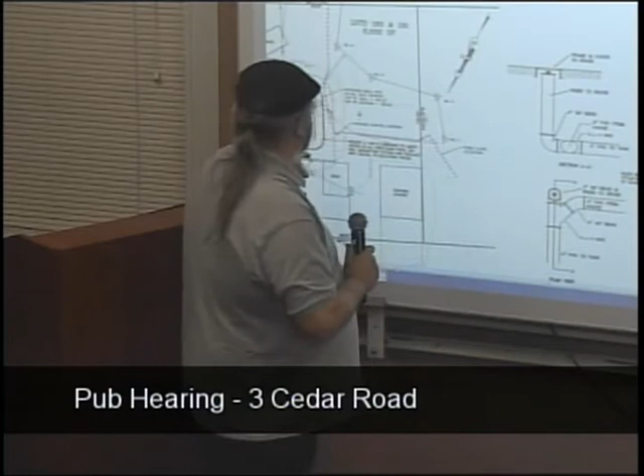Here's my erosion control. Right now, the wall is 5 feet off the system. This is, I don't know if you can see it, the crosshatch and the dotted line right here. That's the overdig area.

Wait a minute, this is the overdig area? I believe, right here. What's the highlight, the dark line that you've got going on? That is your overdig area?

No, that's the retaining wall, with the barrier. See, just inside of that, there's the dash line and it has the hatch in it. Okay, that hatched area is the overdig area. And how many feet between that and the wall is that?

5 feet there, and I've got another 5 feet to the erosion control line. Okay, so you get 5 feet from there to there and then 5 feet to here, so there's 10 feet. So they're digging, when's the wall go up?

Once they remove all the topsoil and subsoil and any material that can't be under the system, then they will start to build the wall as they're coming up with the gravel.

Okay, so we're gonna have erosion controls, you're gonna dig the stuff out of there. Correct, and carry on that conversation for me. Again, whatever's within the overdig, the topsoil, subsoil, and any other unsatisfactory material under the system will be removed, and then septic gravel will be brought in from that grade to just over the system.

And then when does the wall come in? The wall will be constructed as they bring the gravel in. And what do you end up with for top elevation on top of the septic system? The leaching area there, a 186.5 here, and it slopes off to 186. The top of the wall is at 185.25.

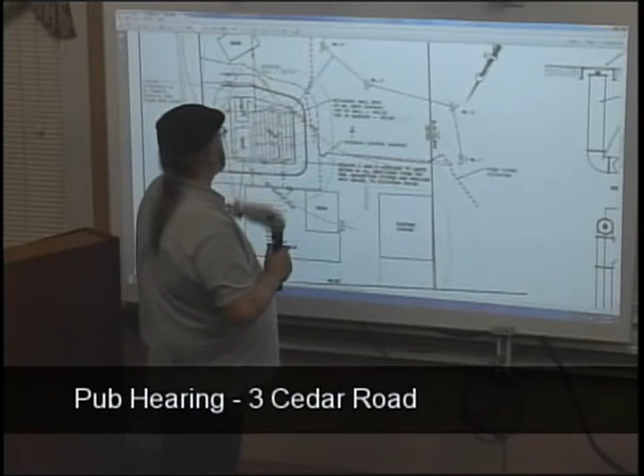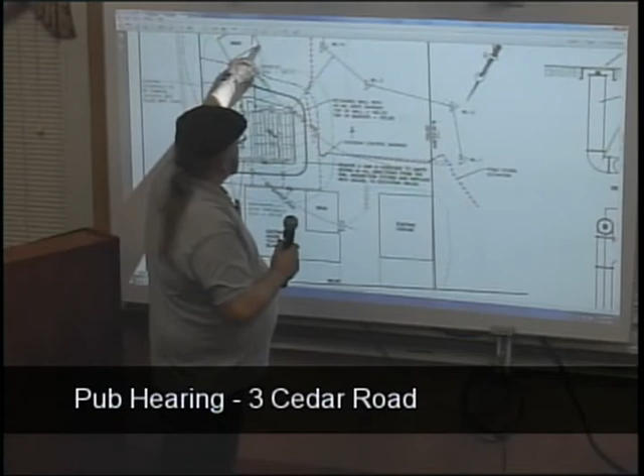That's your call. I just want to make sure they have room to work. If it's okay with you, I'll take this erosion control to the back corner of the shed and bring it down in the field. Typically we go out and stake the erosion control line, they put it in, then we inspect it and send you the letter that it's installed as per the plan. That might give them a little more room if they gotta get into that tree, and it's already there so we don't have to worry, and hopefully people aren't driving wherever else.

And is there a disposal area for the stuff as you're moving it out? It'd be loaded in trucks and hauled right out. There's not enough room on this lot to stockpile anything, so we just want to make sure it's not on the other side.

Do we have a DP number for this? Yes, that came in last week, 625. I didn't get an order of conditions ready because, as far as I knew, there were gonna be changes with Board of Health to the plan, so I've been waiting. Board of Health hasn't approved this yet? We have a meeting with them Monday. We had a previous meeting with them for some waivers, and in their agent's review there were a couple of notes and stuff that had to be changed on the construction details, and there's one additional waiver we have to request.

So we'll be before the Board of Health Tuesday night for that additional waiver. So if we continue this to March and vote on it then, once you have, hopefully, the Board of Health's approval, then we can approve it and you're good to go.

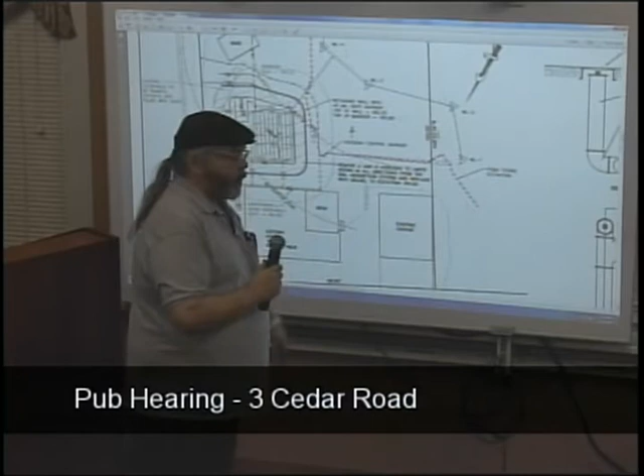Okay, I'll entertain a motion to continue NOI 240-625 until March 11th at 7. I move to continue NOI 240-625 to our March 11th meeting at 7. Second.

Okay, any more discussion? Is there anybody in the audience regarding this? Okay, all in favor, say aye. Aye. Opposed? Okay, that passes. We'll see you next month, Jim. Thank you.

Okay, 15 Lincoln Road. The applicant isn't here, right? They're continuing that. For Lincoln Road? 15 Lincoln Road, that is correct. We have an email requesting continuance of that.

So I'll entertain a motion to continue 15 Lincoln Road, 240-0624, to the March 11th meeting at 7:10. Move to continue 15 Lincoln Road, NOI 2400624, to the March 11th meeting at 7:10. Is there a second? Second. All in favor? Aye. Opposed? Okay, that passes. Which brings us to Meetinghouse Road.

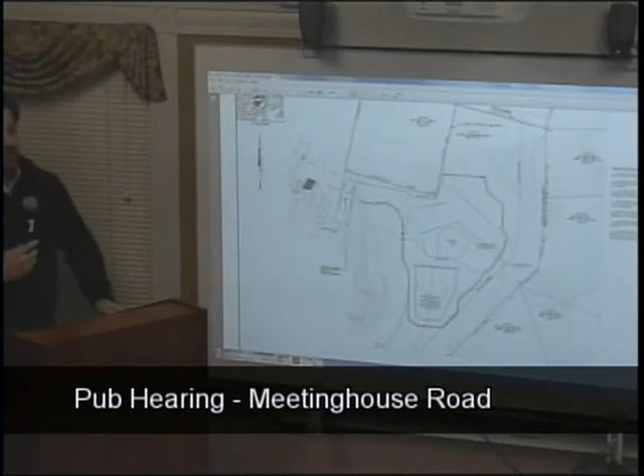The applicant originally hired an environmental scientist who came out and reviewed the area. The resource area in question is this low depression here. It was actually originally constructed as a detention pond. Wait a minute, Amy, could you blow that up for us? Go back down. It was originally constructed as a detention pond for the townhouse development.

However, the Townhouse Association wasn't able to provide adequate maintenance records, and the Mass DEP Oliver site actually deems it a human-altered shrub swamp. But, excuse me, that was put in because of the planning board on the original development. Don't they have a say in that, of being taken away as a retention basin?

We've been in front of the planning board, and they are leaning, I think, toward your commission's designation on that. But we've actually, last night, received conditional approval through the Norfolk Planning Board as part of this project.

So if we scale out a little bit, the project will require overall clearing of just under an acre of vegetation. The work within the buffer zone, we're staying out of the 50-foot no-disturb, which is designated as this buffer here, and this represents your 100-foot. The work within that 100-foot buffer is approximately 10,200 square feet to construct this proposed solar array.

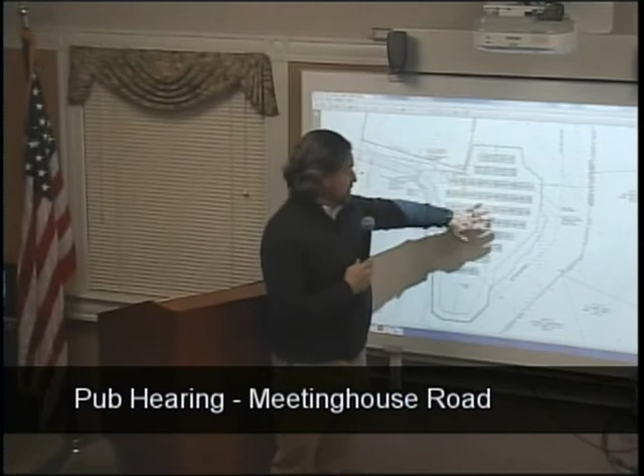The gravel drive will provide access for maintenance vehicles and emergency vehicles if needed. All has been reviewed with the Norfolk Fire Department. For purposes of drainage, as I noted, we're maintaining the existing grade to the maximum extent possible. There is a shallow drainage swale that will be on the eastern side of this gravel drive, with a series of check dams within that swale to help with sediment control.

And then, to direct runoff that currently flows off-site toward the abutters, we're proposing a drainage swale on this east end, again with a series of check dams which will direct runoff to what you see here as this proposed infiltration pond.

The pond itself, we performed test pits on site. We worked with Beta Group fairly extensively through the planning board process, and although this detention pond looks large, it's only basically 1 foot 4 inches deep, due to the underlying soil conditions. Our design stores and infiltrates the 100-year storm event, and we have a foot of freeboard around three-quarters of the detention pond, with an emergency overflow that would, in an event greater than a 100-year storm, continue flow of water in its natural direction.

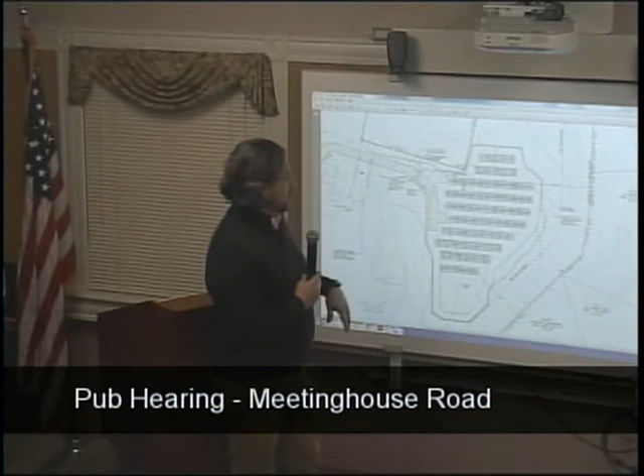The work we're proposing is limited to the area between the 50 and 100-foot buffer. No work is within the 50-foot buffer zone, and we've pushed this gravel drive as far north as possible to stay outside of the buffer zone within that area. We have submitted to Natural Heritage.

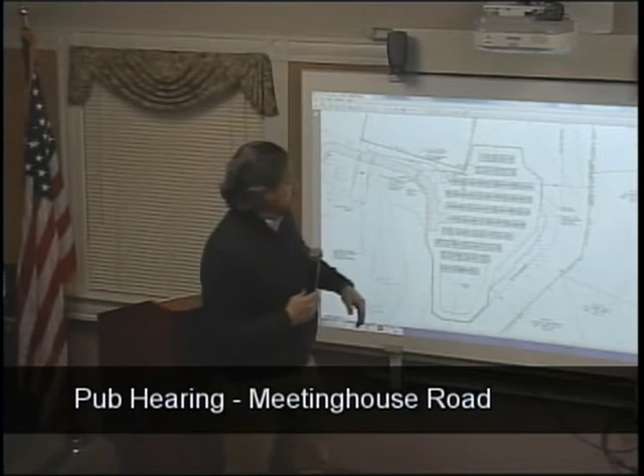This area does lie within a Natural Heritage area, I believe for the box turtle, but we have not received a letter back from them yet. If you're familiar, this is the easternmost access drive off of Meetinghouse, and this is the existing pump station for the sewer treatment system. So it's the area behind that. The grade drops off very steeply to a little pond area, and then it gradually slopes back up. And this is the water tower.

The area of disturbance with the solar arrays will be reseeded with a conservation mix. There are actually two seed types proposed in the planning board's conditions that the applicant has no opposition to. An operation and maintenance plan was provided with this application as well for review, involving cutting it a couple times a year.

One thing not shown on this plan that was discussed last night, and that I'm still working on with the planning board, is we are going to add some additional evergreen vegetation along this fence line to provide more screening to the abutters along Union Street.

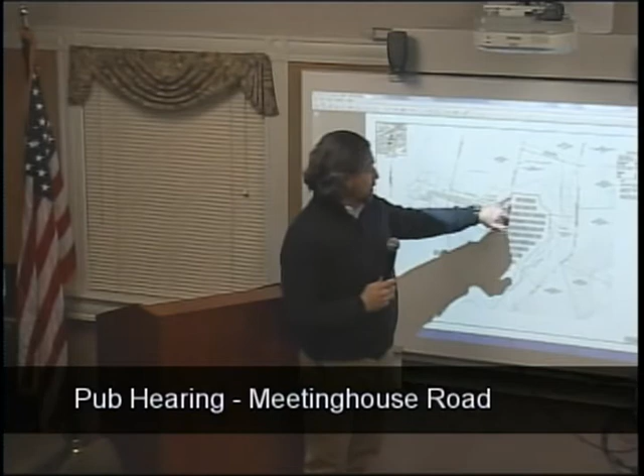Where exactly are we going to plant these? It's going to be along this eastern fence line. I'm in the process of working that out with the town planner. It will be outside the proposed chain link fence. Around the perimeter, basically the limits of clearing will be a 6-foot high black vinyl-coated chain link fence, set 6 inches off the ground to help with critters.

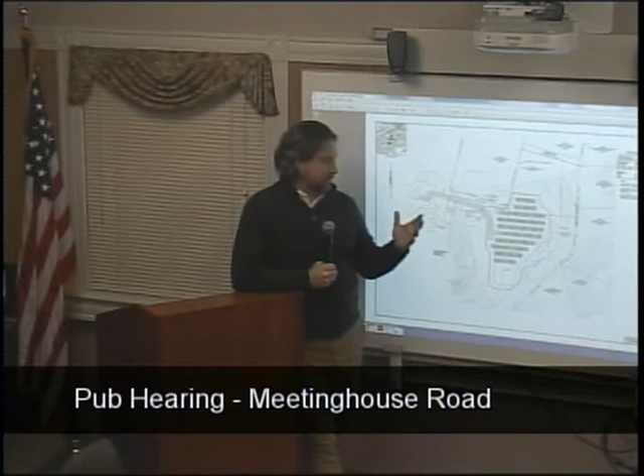Will those trees and shrubs be maintained for a while to make sure they take? Yes, I've had them die before, many of them. Within your zoning bylaw, there's a maintenance requirement associated with what they refer to as a green belt. Although we are outside of the 100-foot buffer requirement, we've worked with the planning board and the applicant has agreed to install additional vegetation, and as part of that, they'll be required to provide a maintenance fund.

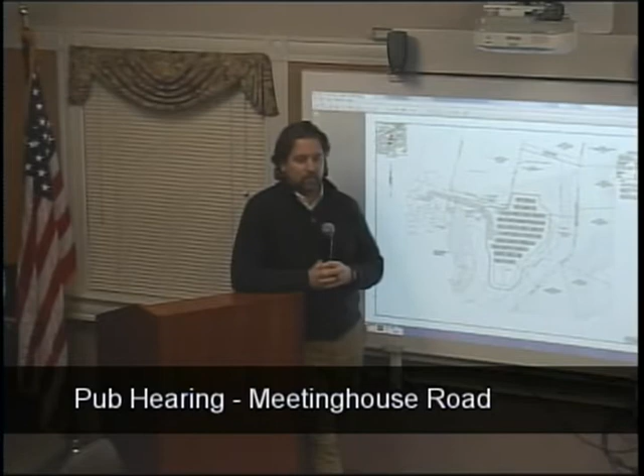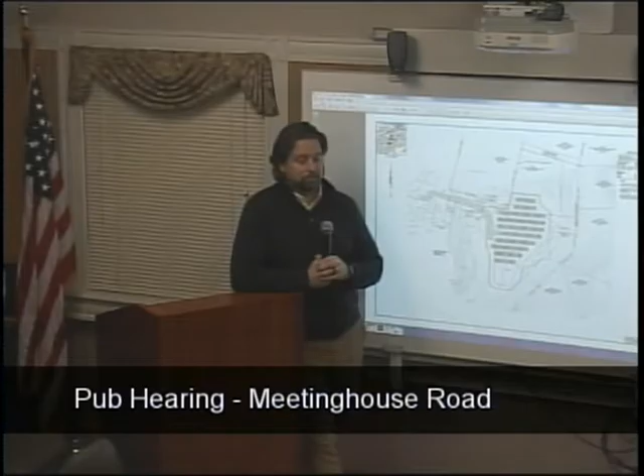But it was a retention pond, according to Rich. Well, that's something I heard about this afternoon. Yes, anything we get is supposed to be in by Monday before 6 o'clock, so we can look into that. But I appreciate you, regardless of what it is, calling out the area. I do appreciate that, thank you.

Anyway, so it's on this upper end here, but can somebody spot check to make sure I won't have a problem if that's within the 50-foot do-not-disturb area? Then there's no quibbling about it. I just want to make sure, because that's obviously an area where water is going now, so make sure there's room for it.

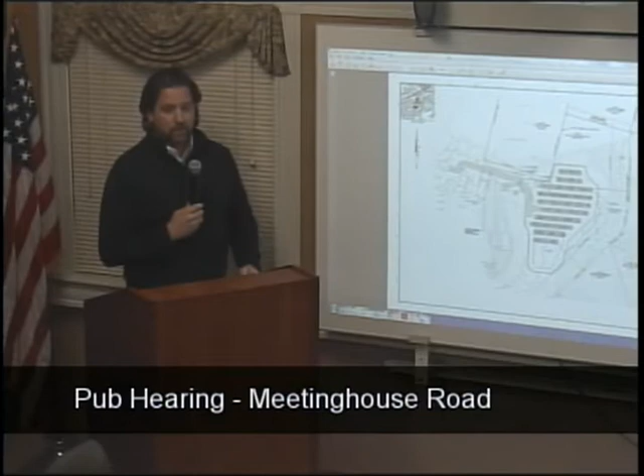There's a lot of boulders and miscellaneous trees and everything out there though, right? Well, within that area, the trees will be cleared. I can't speak to what the applicant will do with some of those boulders.

So the pitch out there is okay for all the solar, the way it is now? So they don't have soils that they have to dig up and pull out of there? They do not. So again, these bold lines represent the proposed contours, and obviously there's some grading associated with construction

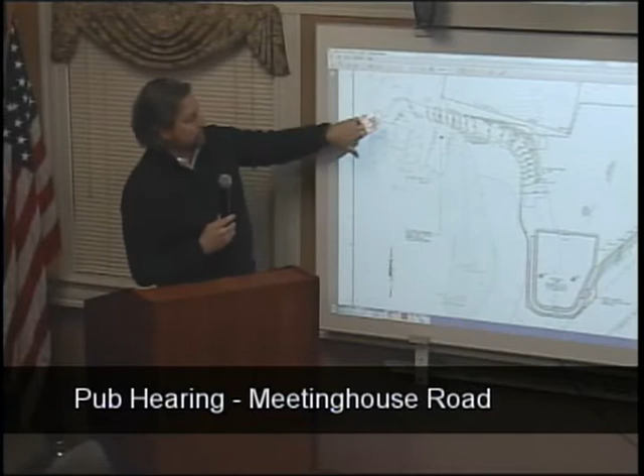of this gravel drive. It's still relatively steep, but because it's not technically a road, the planning board was okay with that in terms of access, because you're talking about trucks coming out here a handful of times a year to do maintenance and just check on things. So that's the limit of the grading for the drive.

There's some minor grading around this detention pond, and then all of this is just kind of maintaining existing grade. It'll be obviously different vegetation and cover type, but right now it's wooded and it will be grassed, as I said.

And then there's this swale that I talked about on this side to help direct water towards that detention pond. Do they expect any overflow from the side there, or do they think that it's all gonna just? Right now, that pond is sized to accommodate the 100-year storm event and infiltrate it all.

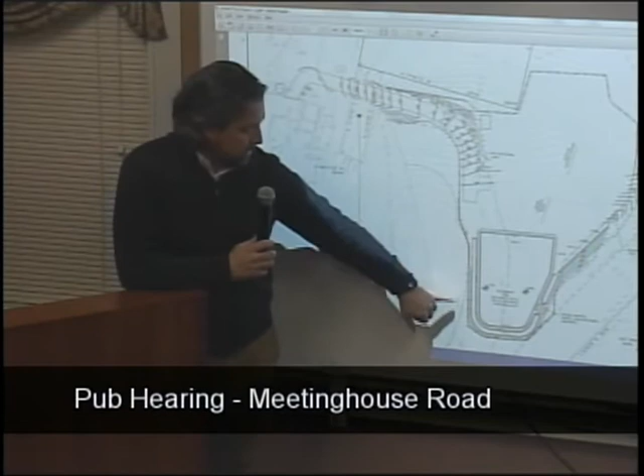I think the peak elevation is about 256.42, and the emergency overflow weir is 256.6, and then there's a berm here that's 257.5. Just to make sure that, okay.

Oh, and then last thing, hopefully last thing, before you wrap up, I'd just suggest waiting to hear from Natural Heritage, because sometimes, as far as vegetation, you're into mowing certain times of year or whatever. Understood. Correct.

Okay. Yeah, they have 30 days. I think the revised plans were submitted the same day as the notice of intent, which was the 28th, that Wednesday. So they have a little bit more time to respond, but hopefully we'll have that plenty of time before the next meeting, so, okay, super.

Any more questions, Janet? No, I think that kind of took a lot of wind out of my sails. Thank you very much for your patience.

Any other board members? We've already worked out the seed mix for the planning board. Yes, that was, I believe, miscellaneous condition number 1, where they referenced, I think, 2 different seed types that they were okay with.

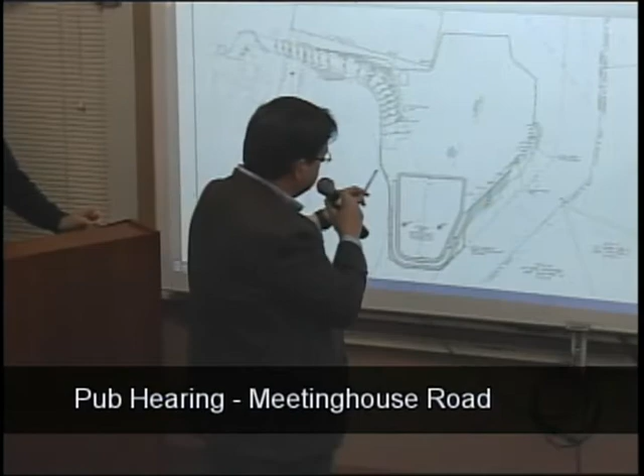My main concern is the runoff that may occur, and I appreciate what's been said about maintaining the existing grading, but there's a pretty decent slope coming down to my own property, and I've received water in the basement in the past after a couple of days of rain. If we're substantially altering the ecosystem here, taking down trees and replacing it with sod, is that going to exacerbate the runoff through even the natural slope? Will the existing soil be able to absorb the water that the trees had in the past?

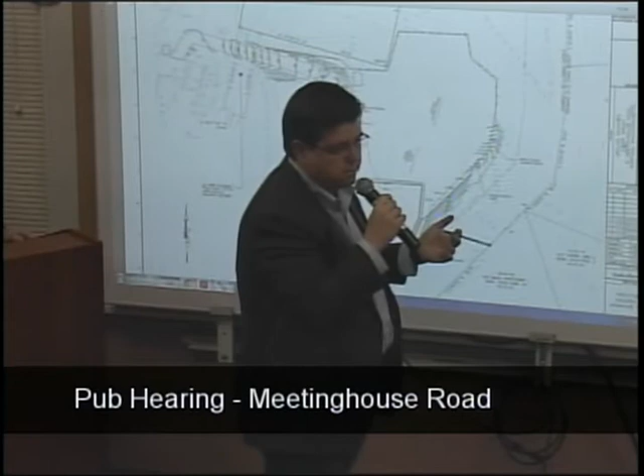What you probably can't tell from this plan is there's a fair amount of ledge running right through this slope. In a lot of places it comes right to the surface, so it's not ready-made to just absorb water as it is right now. So that's a primary concern, that this project is going to have a negative impact to my house and to the basement.

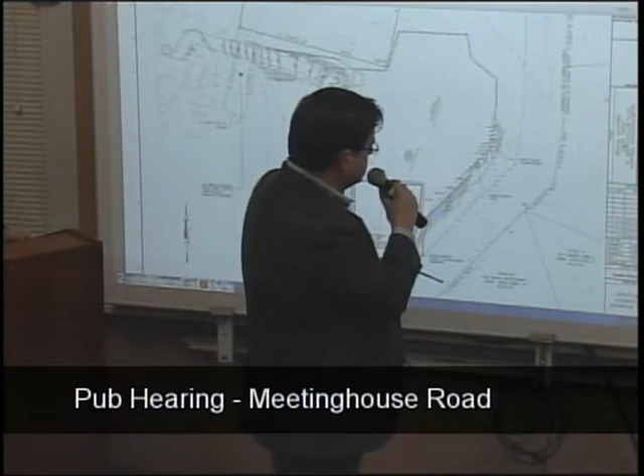I don't know exactly what a swale is or how it was determined to go to this point right here, so I'm interested to know more about that. And I'm just curious to know the potential negative impact to my own property, and what, if there is a negative impact, can be done after the fact.

So I guess probably the easiest question is, going from forested area to a grass area, there's an increase in runoff, and that would be why you have the berms, at the heights that you have the berms? Correct, and as well as the detention pond to offset any peak flows.

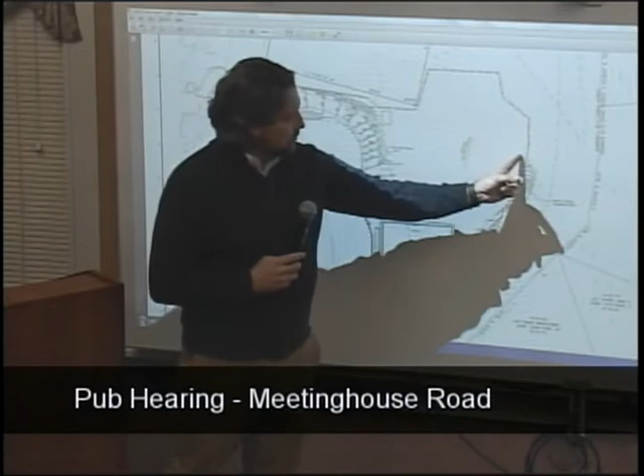So we actually analyzed it in 3 areas, and the stormwater summary is provided in the application. You have catchment area 1 that flows to this existing detention pond. The ridge line is approximately here, and you can kind of see it's almost a natural swale that directs water here, with a ridge line right along here. So we had catchment area 3, catchment area 2, and catchment area 1.

And we analyzed all 3 for the town of Norfolk for the 2, 10, 25, 50, and 100-year storm event. In all scenarios, we're not increasing any runoff, whether it be peak flow rate or volume, off of the site based on this development. And that report was reviewed by Beta Group.

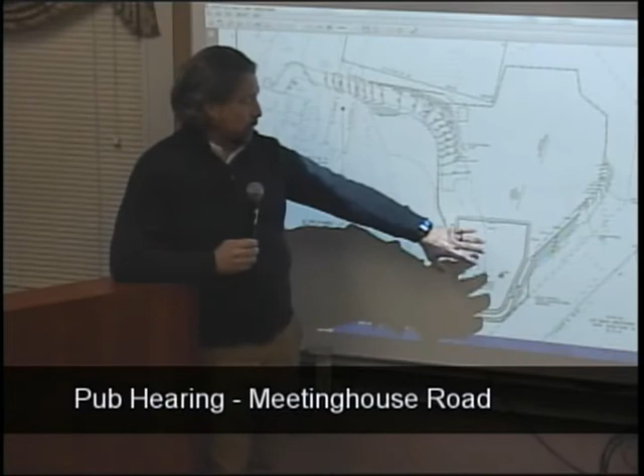That part was okay in the peer review? Correct. Yep. We had a couple of minor changes, but nothing major. The changes were associated with the infiltration rates used, which were assumed at first. We then performed actual in-place test pits. We felt we used an additional conservative rate, but Beta Group requested we use an even more conservative rate, and that's what the final report is based off of.

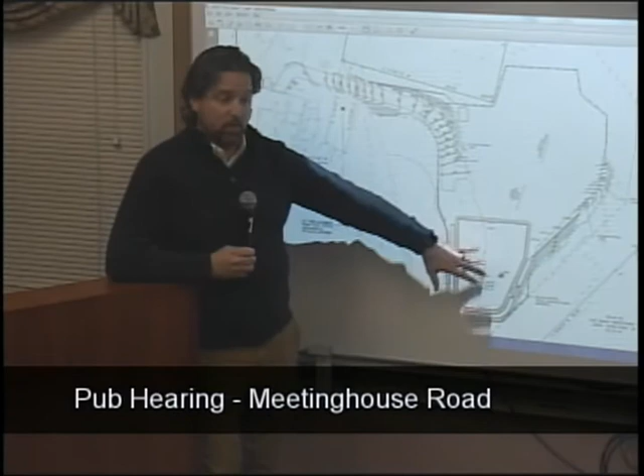So personally, I believe water is actually going to infiltrate faster into this particular area where we're directing it than is what's currently proposed and designed.

So basically the science is that there's a different rate of absorption in a forested area versus a grass area, and there's more runoff in a grass area. So when they do the calculation, that's what they account for, and the detention pond's based on the permeability of the soil type that's there.

And then they do it based on, they go all the way up to a 100-year storm. And then we also had a peer review outside this company that reviews all his calculations. The report we got back is that they had a couple of minor changes, but all the changes that were done made it so that it would be at least a 100-year storm effect, would catch all the water on this site.

Thank you both for clarifying. I just have a couple of follow-up questions, if I could. So I still am a little unclear as to what a swale is. I would imagine by the context that it's some kind of manufactured something or other to assist in helping water to direct.

It's natural grade, but basically what you do is you contour it to use it to direct water to where you want the water to go, if you will. So right now, as you can see, if water were to hit here, it would flow along this channel and it would be directed into this detention pond. Right now, water just sheet flows down to the abutting properties. Okay.

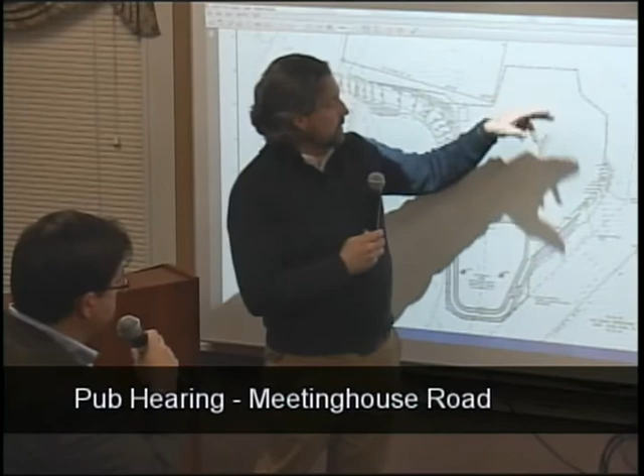We revised the layout for the portion where originally we were clearing more land up here, and we actually brought the solar panels to the opposite side of that ridge line to help mitigate any off-site impact.

So the solar panels would begin roughly around here? Yeah, if you take this fence line and offset it 15 feet, that would be the first panel. But there will be trees and whatnot removed in this general area.

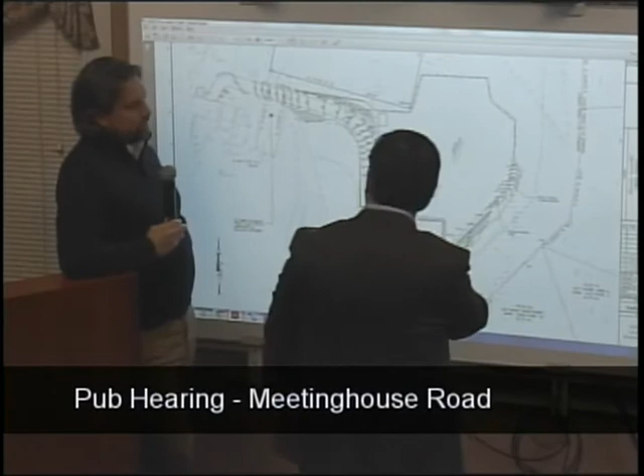Correct. How was it determined - I guess this is the peak right here - would there be runoff coming down this way, not assisted by the swale? That flow pattern will remain the same, because we're not changing any grades here, so that flow pattern remains the same.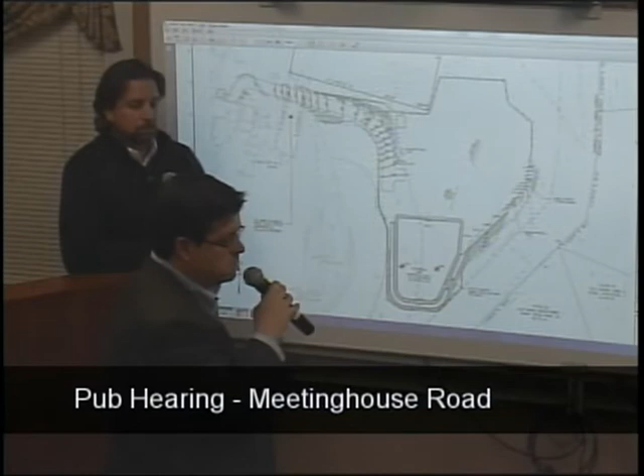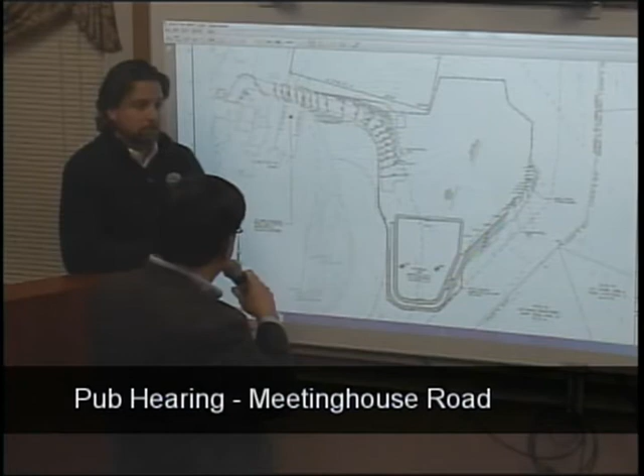Okay. I assume during construction, with large machinery running up there and removing trees, how do you ensure that the grade ultimately doesn't change when you're doing that level of work? I'm not sure what the requirements and conditions are in terms of as-builts, but the applicant isn't here - he's not going to want to change the grades because it's going to cost him money, if that makes sense.

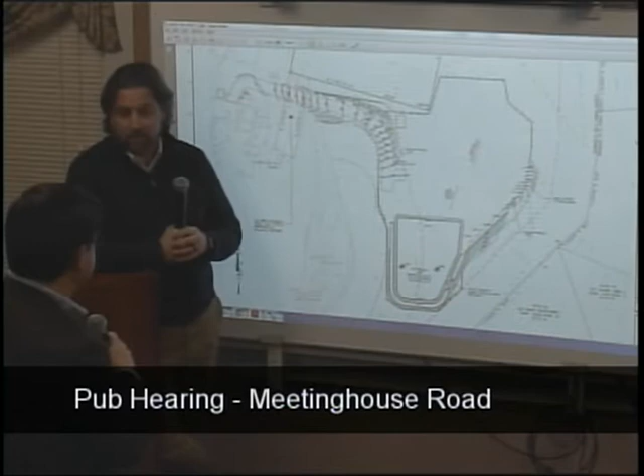I would think the town planner would be involved in those type of aspects. So if you want to talk about those things, talk to Rich McCarthy - call him. Rich and I were actually talking about it a little bit earlier today. Yeah, he's the point person for those kind of questions. That's out of our jurisdiction, really, in terms of how they measure and stuff.

We just want to make sure where the water flow is and that it's retained properly. So, if this project does have a negative impact to my own house as a result of anything that could happen that was unanticipated - the water flowing a different way or whatever - at what point do I have recourse? I'm for solar and renewable energy, but not at the expense of having a flooded basement.

Again, that's out of our jurisdiction - you'd have to talk to Rich again. I would think he could, or the applicant, but Rich would be the one to talk about those type of issues with. So it's not necessarily an environmental type of situation? As long as they meet requirements - our jurisdiction only extends to the wetland resource areas. Got it, okay, thank you.

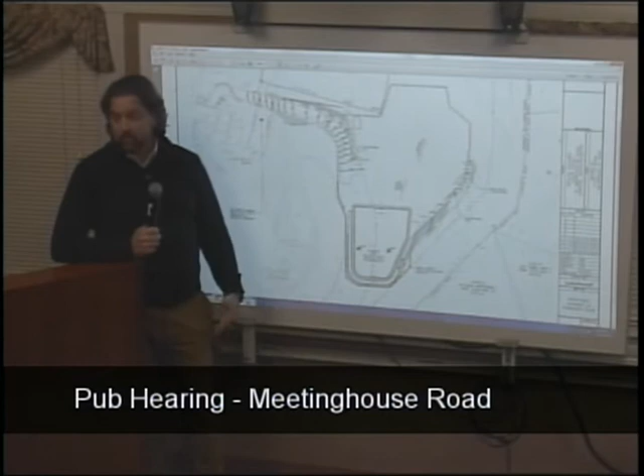So is 2B at all impacted by this? No, not at all. And again, as I noted, the total amount of water flowing over land off-site within this footprint is actually being decreased as part of this development because we're slowing it down, storing it, and infiltrating it.

Okay. Janet, do you have a comment regarding the old retention pond? I don't know if you've seen that little wetland up there. It's the mic. Janet, can you use the microphone? I'm so sorry, I'm talking into the mic.

Right now it's like a big ice skating pond, but it's got a berm on both sides, so when water comes to this area, it can't go into it. It depends how much can go into the ground. Right now we're still kind of frozen, so later on this might all dry up, but it's kind of trapped here, like a puddle in your yard.

What they're doing with this detention basin is, if the water's coming here, they calculate how much water's coming, check the ground for how much can soak in, and if you get a really lot of rain, they have an overflow so the extra spills out. It's like the overflow on your tub - if there's a problem, it goes through the hole. They're calculating everything, so if they get way too much, they have a way to send it out somewhere safe.

Okay, I can understand that as much as I can. But I'm still also concerned, and I put it in my letter, about what kind of recourse I have if my basement does start to flood. And there was no comment on that from the planning board.

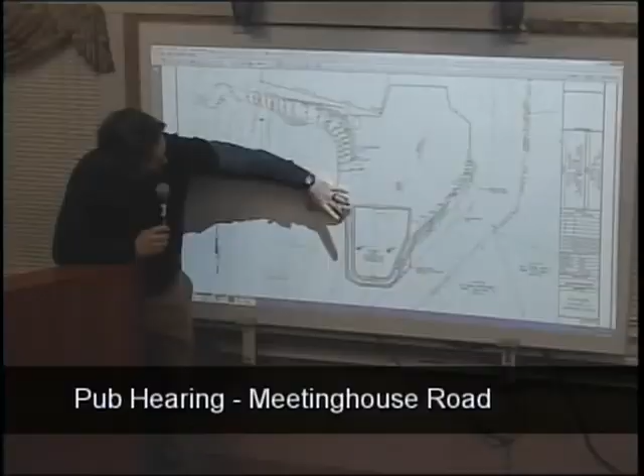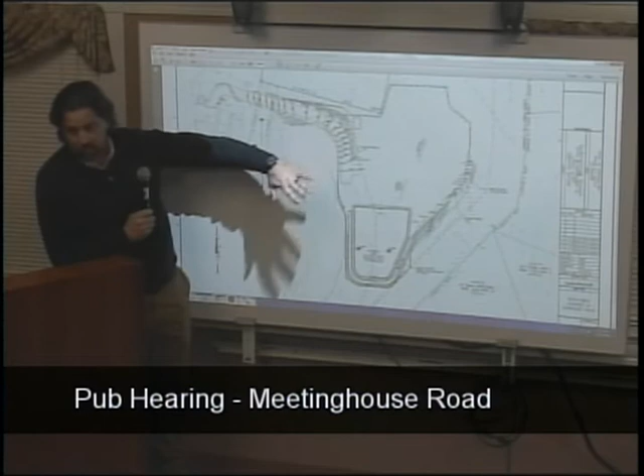That abuts all of the Meetinghouse properties. If you can see this strip, that's all vegetation that's going to remain. At its shallowest point it's 50 feet of wooded area that will be maintained and untouched. There's a line here, a clouded line representing the existing tree line. So this entire area between the solar array and that slope is going to be existing maintained vegetation, untouched.

As you get down closer to the retention pond, it looks a little thinner than 50 feet, at least on this image. I'd have to scale it - this is a 50-foot buffer from the line, so maybe it's 45, but it's approximately 50 feet.

Okay, and you said there's a 6-foot black fence - would that also be on the west side? That would be on the east side of the new tree line, the side that abuts Union Street. No, I'm sorry, it's around the entire perimeter of the solar array. It's fully enclosed, gated and locked.

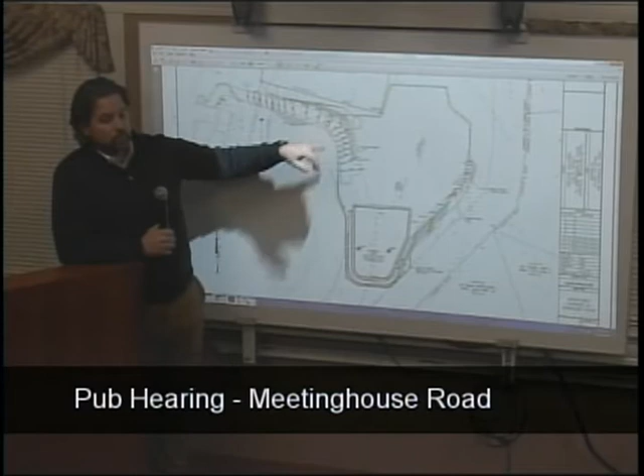And where was the gate going to be? Right at this location here, so Public Works can still access the water tower.